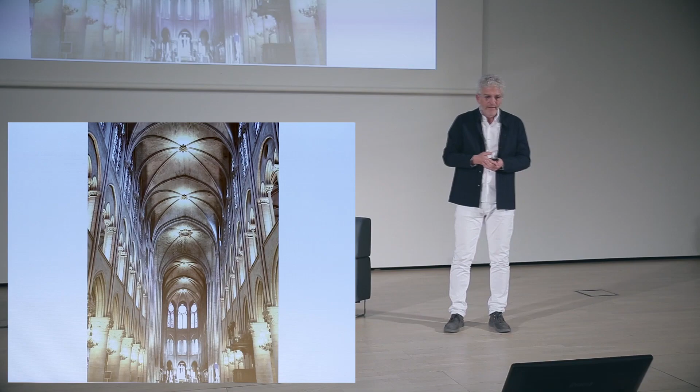And if we look very briefly at the history of architecture, we see these peaks, these great achievements, whether it's the Pantheon of nearly 2,000 years ago, this amazing dome that the Romans built, which is engineering and architecture all together, or if we look at the Gothic spaces, these light, very transparent spaces with the flying buttresses that allow this architecture to happen.

So I think we should have it a little bit darker in the hall. I want to show you the Mount Herzl Memorial as a stone-telling project. It is a project where the stones actually tell you a story when you come into it.

And if we look at the site, it is at the entrance of the military cemetery. It's in between the city and nature. It's between the noisy life of a daily city life and this silent landscape.

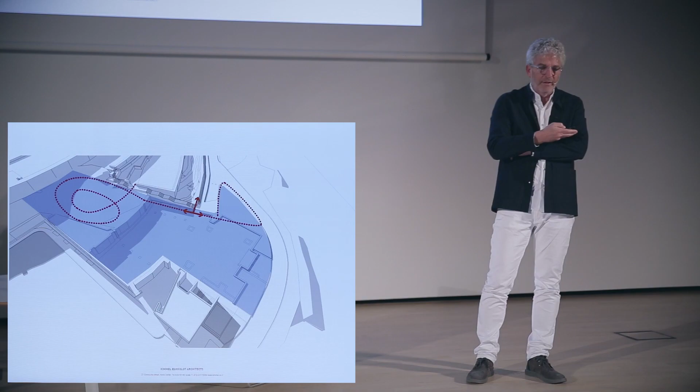And the site is very tiny. It's just 30 by 30 meters, and we need to have a big hall there, and we understood that we will have to dig the spaces underground, like this beautiful museum that we are in now, and find the spaces inside the mountain, and create the possibility to have a longer circulation than just the limited size of this site.

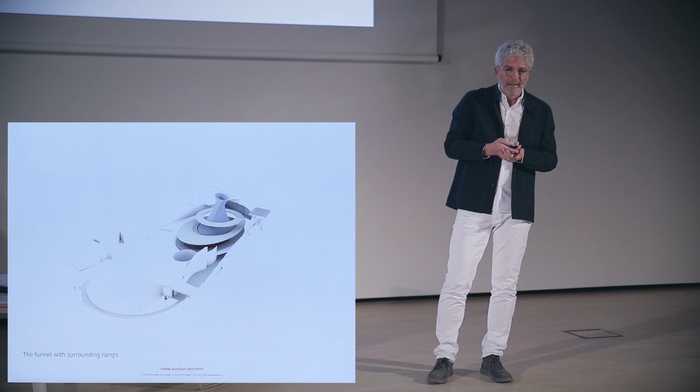So we introduced the idea of making this circulation the spine of the project, and we understood that we have to take people down from one side of this axis and lead them to the hall, and then when they are in the hall, they would start to climb on the ramps around this very special light bell, this vortex of stone and light, and then they end up in the graveyard when this wall of names wraps them all around.

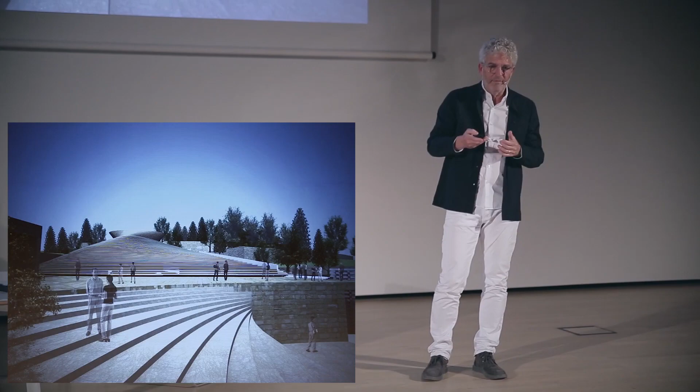And then at the end, on the roof of it, we will reconstruct the topography of nature there. We will reconstruct it by layers of stone, and these layers of stone, we see here the renderings of the beginning of the process, and these steps will function as a place to sit and reflect and connect to the nature which is around you, and look at the views, and even relate, nearly as if a treetop is in the wind, to the trees that are around it. So the stone mountain actually is affected by the wind.

And when we enter this project, the memorial, I want to talk, of course, about the second most important aspect of such a project, and that's the essence of the project. The memorial is a place where Israel decided to bring all the names of all the soldiers who died throughout the wars of modern Israel, and it's nearly 24,000 names that had to find a place here to be commemorated.

And when we started thinking how can architecture create a special place, a place that would move you, a place that will give you a sense of sacredness. How can we make a sacred place that will bring you into a different dimension, not your daily life, but will disconnect you from daily life and put you in this silence, in this philosophical mood of thinking about the past and thinking about the future and dealing with the memory of all those who died.

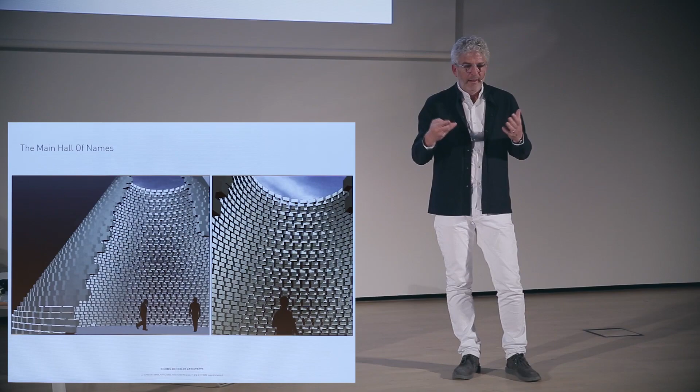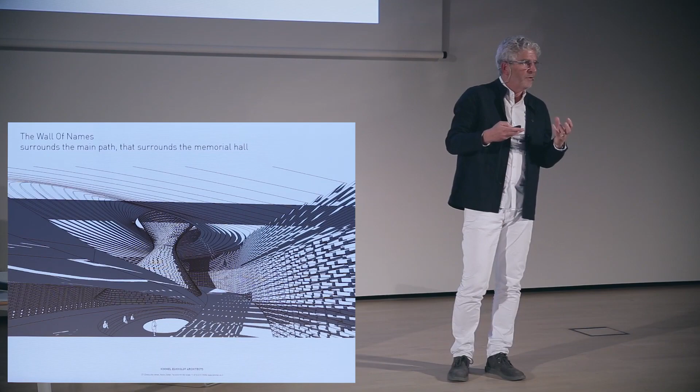And we understood that it is an issue of light, of how to use the daylight, how to create a lattice of material and light. And from the first moments of the process, we tried to find this way to build this lattice of material and non-material that will help us to build the memorial, and how to connect to the sky, how to connect to the daylight was very important. So we started to develop the shapes and the way we deal with the daylight as if it's a material, one of the materials of the project. So we have concrete, we have stone, and we have daylight. These are the materials that we are going to build the memorial from.

And we enter through a dark passage where there's a beautiful art piece by an artist named Michal Rovner. And then we see the light at the end of this passage, this special daylight.

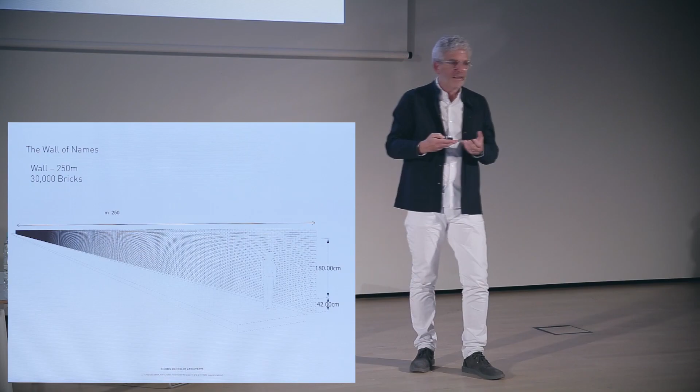But a very special moment in the design process, nearly a technical moment, but a very important moment, was the minute that we understood that we are going to do this issue of memory, the memorial hall, by bricks of memory. Every brick will have a name and a date. And this brick will be the private place of the family who lost their child. And the brick will build the wall, and the wall will build the hall. So this understanding also, of course, led us to understand the dimensions and how long this wall should be.

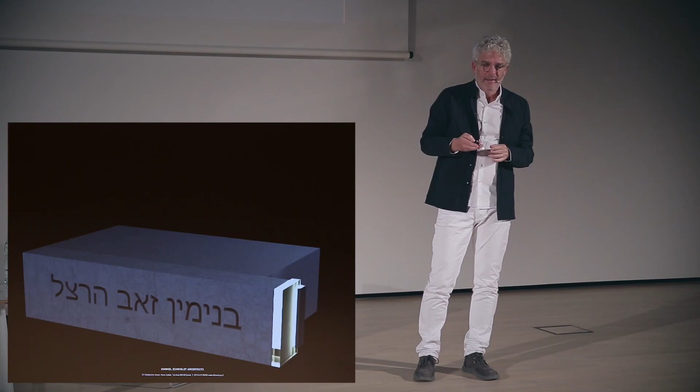And we decided to have a special light that lights on the day that this soldier died. So every day you come into this memorial, different lights shine in this wall, and also this technique of how to do it, how to orchestrate these 24,000 names.

And you see here some close-up of the wall of names. And it's like if you take one name out, then the wall loses its stability. So it's like every stone helps the stability of us, of the community of Israel. So you see here the wall of names and all the technical parts that are behind this wall of names to help with these lights.

And if I start to explain about the light bell, this vortex of light that is in the middle, that is nearly defying gravity, it was a very, very tricky piece to design, because it's totally irregular. It is ellipses that always rotate like a vortex, because we wanted the light to come in a very special way.

And if I give you a very, very short lesson in Hebrew, but an important one, it's that the word halal has triple meaning in Hebrew. It means space, it means also void, and it's also the name when you want to say a fallen soldier, you say halal. And this is the essence of the project, that this void of the space around us connects to the void in our hearts for the loss of all those who have died. And we see here that this light bell connects to the sky and pours light in.

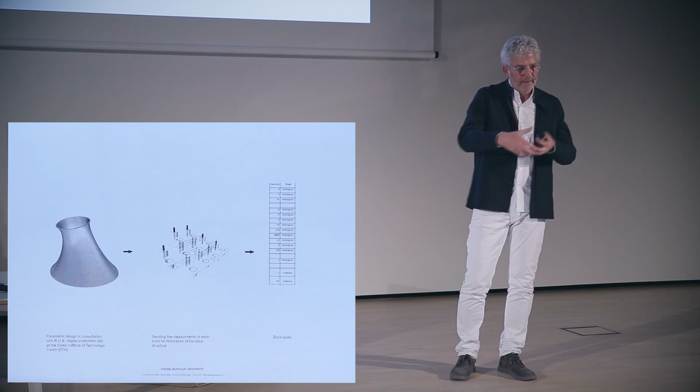And the technique that we wanted to find took quite a while to figure out. Of course, nowadays with all the computers, the parametric design, we established a system where we have a brick that is generic. It's always 30 by 40 by 10 centimeters. But every brick, though generic, is singular in the way it's CNC'd, where the bolts and holes are, and it's marked.

So when the brick comes to the site, the person only has to put it. There is only one place that he could put it. It's like a Lego. So he doesn't need plans. Once the bricks came on site, it was very, very quick and very, very precise. And this precision is a very special phenomenon, because it looks nearly like a natural phenomenon more than a man-made structure.

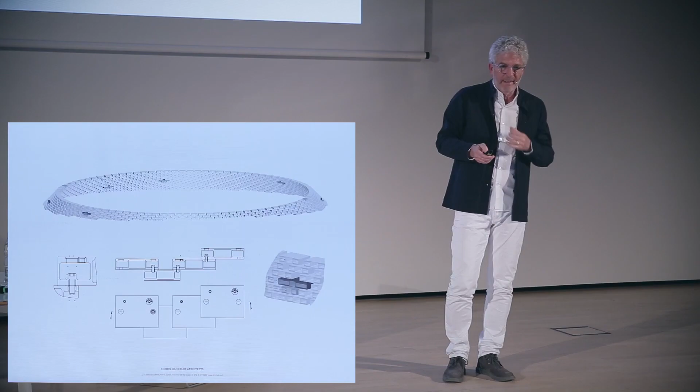So when we analyzed this and we did some mock-ups and understood exactly how we're going to build these bricks and how we're going to connect them and how we're going to fulfill all the demands of the engineers, we also had to find a way to calculate engineering-wise all this structure. It was very, very difficult, because structural engineers in Israel couldn't really cope with this irregular form that has no secondary structure to it. The bricks take all the load.

So finally, what we found is that the army has these engineers that in daily life design tanks and war machines, but they have this knowledge and this expertise, and they could help us with calculating it, and that's how we managed to build this form.

And you see it when you walk around it, and the ramps are all around it, and the way the section is, where you have the mountain around it, and you have this light bell, this vortex in the middle. And what we did also is we used the computers to create the molds for the floors, to create in the CNC these very, very soft shapes, because we wanted the building to feel soft, to surround you in a soft way. So all these curves and lines could only be done by computerized molds, to reach these very, very smooth lines of concrete.

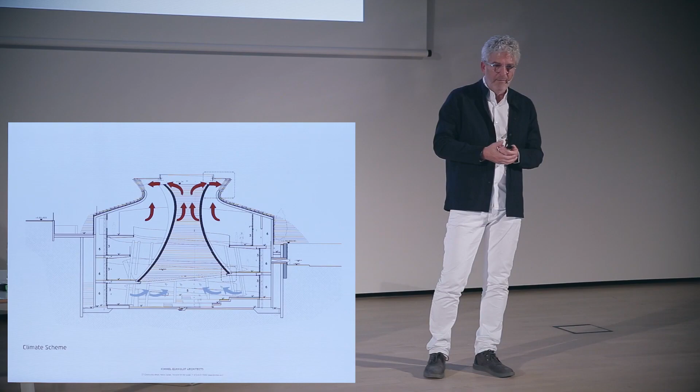And speaking about sustainability, I know that we architects always love to draw, when we send competitions, these blue arrows and red arrows that describe the air, but this project is really a proof that it actually works. It's really cooler in the summer and warmer in the winter because it's underground, very deep underground, and the hot air can go only upwards.

So I show you a bit of how this space feels, and how it has to bring you into a certain state of mind, of a sacred place, of a place of memory. And if I show you the process a little bit, it's in this movie.

Sorry. Why is this movie not working? Can you help me there?

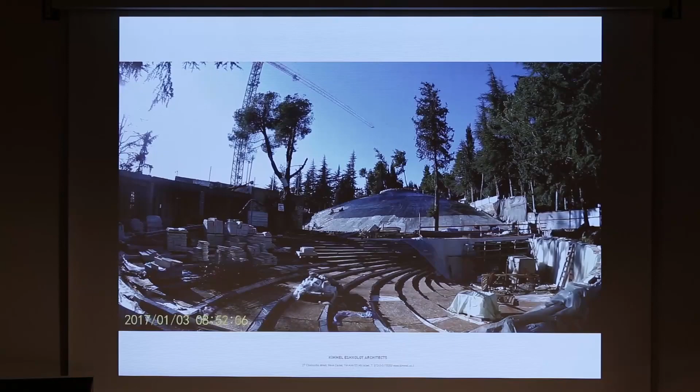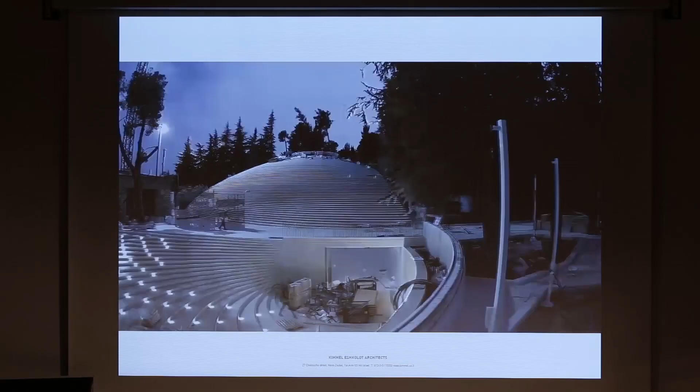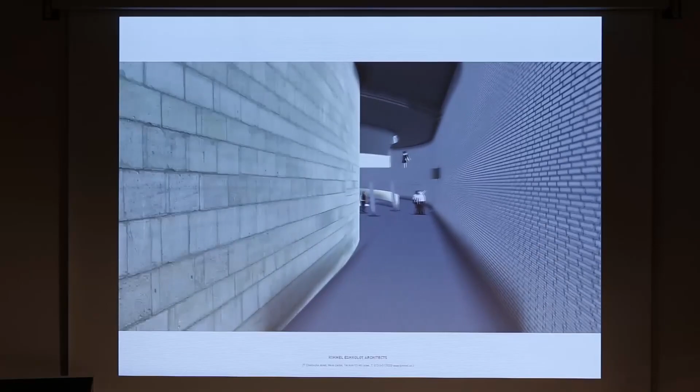Right. So what we see here is actually the process where we started off with the renderings of this memorial, and how we enter the memorial with this ramp leading us down to this passage where this artwork is. And we see how this topography of stone is being built layer by layer, and becoming this mountain of stone, and the way the steps lead you down to the space of the memorial itself.

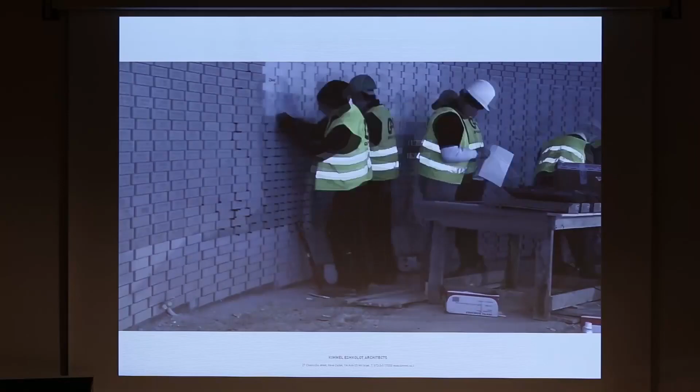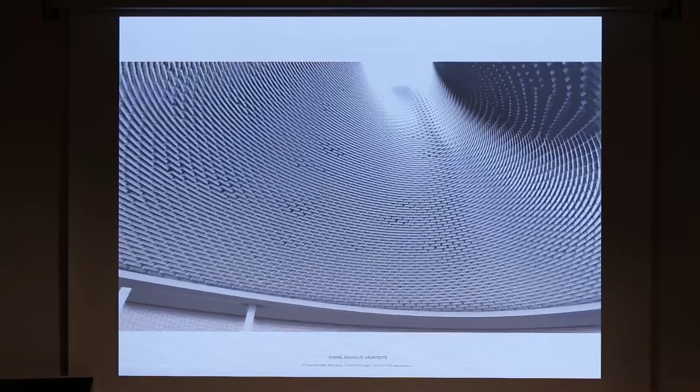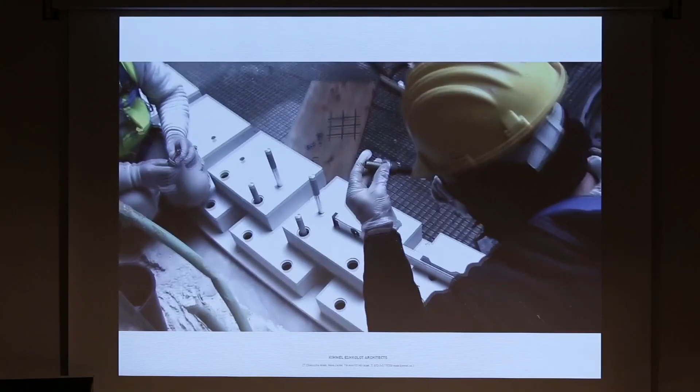Here we see the passage, and how the builders built this wall of names, and every name has this specific brick and a light next to it that lights, and how they cast all these ramps and all the floors, and the light well itself, with its beautiful daylight coming in the models, and then all the design process until it actually came to site, and they only had to screw the bricks that came and put them into the position.

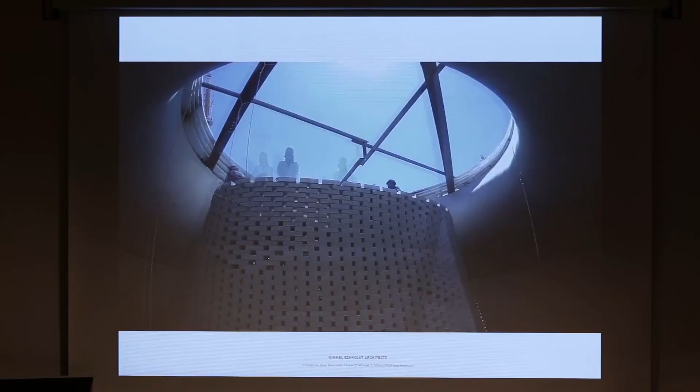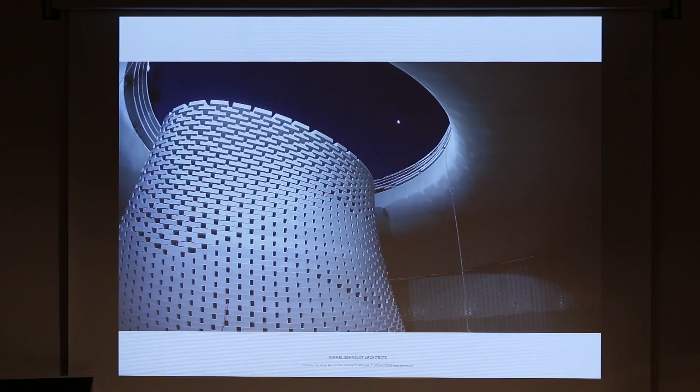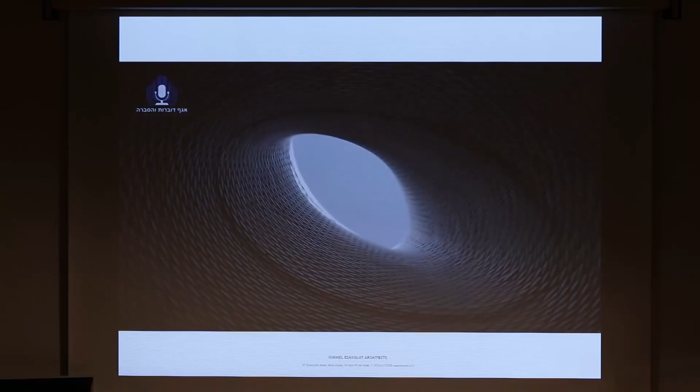It wasn't so fast as in the movie, but it was very fast to see this shape become, and very, very fascinating. And this is how this looks today, with actually the material of daylight as a key player in the project.

So this was the Mount Herzl memorial that I wanted to show you, and I want to show you now, to stay in Jerusalem, I will take you later to other places in Israel, other climates also, a museum we did some nearly 20 years ago. It's a museum of archaeology, and it's inside the walls of the old city, and it's for us nearly urban renewal. It's an urban renewal with a gap of nearly 1,600 years in between.

There are remains of a 7th century Umayyad palace there that we see here, and there were hints of how the Herodian street was still there, and you could feel the city, how it was in the 7th century. And what we did is actually we caught a corner of such a palace. Oops, what's going on? Sorry, let me go back a little bit.

So we had these remains of the walls, and we had to think of how to build this project. And what we decided to do is put everything again underground, where the ceiling of the project is actually the floor of the ancient palace, but most of the spaces are underground except for one piece that is totally transparent and is 4 meters above ground.

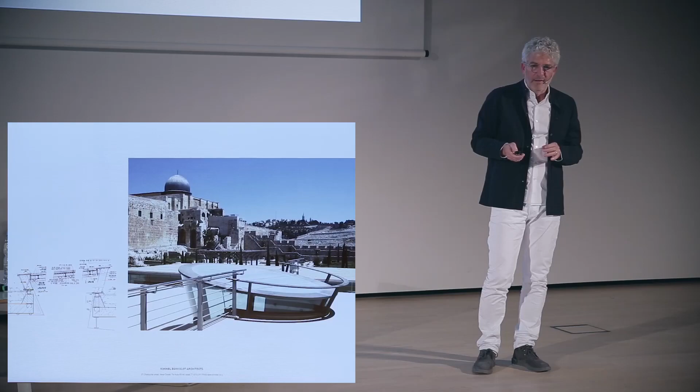And you see that once the building is above ground, it's very, very transparent, very crisp in the way it's detailed. And again, we did something that had to do with technology there. We have this oculus of glass that is the only landmark of this building, and it's the last moment that we see the vistas to the outside before we go into the dark spaces of the museum itself.

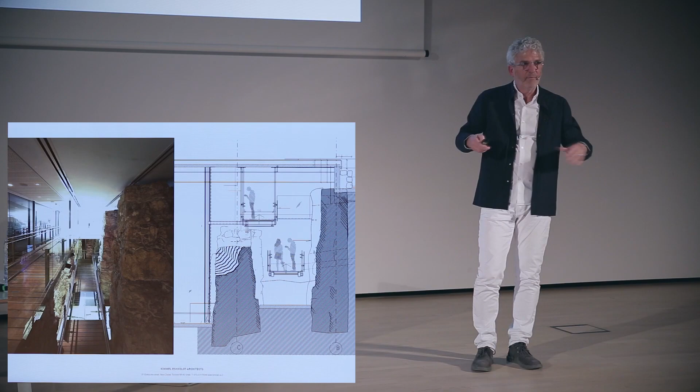And once we had to introduce circulation, we did a whole set of ramps that lead you down. They float between the old walls. You see them here leading the public down to -8 meters from where they entered. And how to, again, do old and new, and how to make a celebration out of it, a sort of love story between the very new and the very old. And if we do an opening in the old walls, we don't disguise it as an opening that was there all the time.

We actually saw this thick wall was a new opening, and all the technology is inside this new opening. And again, we have this transparency around it, I've showed you that.

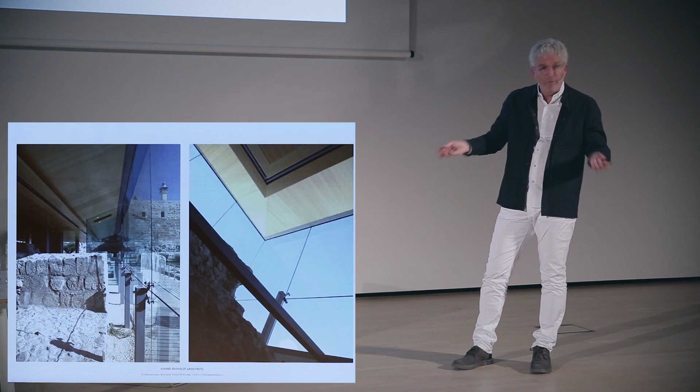And this transparency, if I may say just a few words about it, it was quite, let's say, a challenge at the time to have a huge glass that is only supported by two spiders at the bottom part of it, and the rest of the 4 meters are completely without spiders, and how to create the roof so that it doesn't move even 1 millimeter, so this glass will not break.

And it was important for us, again, to show you how transparent this building is towards the vistas around it and towards the old walls of the city that this building is next to. So this is what was important for me to explain about transparency in the Davidson Center and Davidson Museum.

And now, if I take you to an area that is nearly the desert in Israel, it's on the verge of the desert, 200 millimeters of water a year, and the city is called Beersheba. It's a young city with a lot of universities. And what we designed there is a rehabilitation center.

And the rehabilitation center, talking about site and context, was just in the middle of nowhere, in the suburbs of the city, nothing to relate to in, let's say, the vicinity of the project, except for a beautiful art piece, I understood that you had an exhibition here last year of this work of Dani Karavan, who did a beautiful work about 500 meters from where we designed this building. And this was a little bit of a context for us to relate to the way he used shapes and concrete in the desert.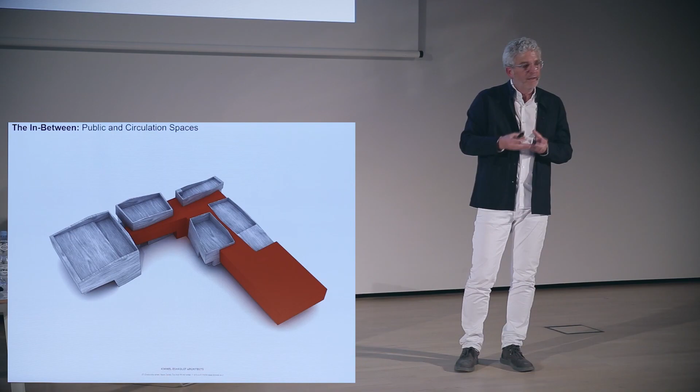And in between these functions, we will have the inner spaces that are used for public spaces, for circulation, for things like that. And this in-between space becomes a very, very light space with very special quality, because it's between the rocks. It nearly looks like a gorge between rocks in the desert.

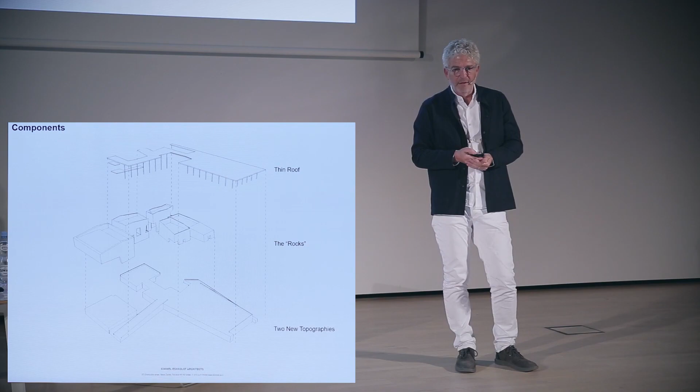And the components of the building are the ground, the topographies of the ground with the ramps, the rocks themselves, and a very, very light roof on top of it. And this is the assemblage of these rocks and the roof.

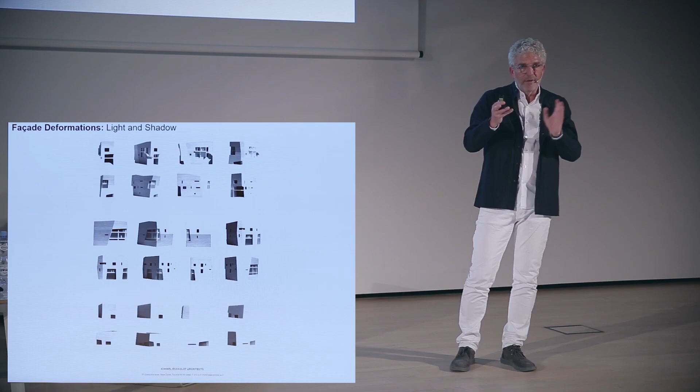And by designing these rocks very carefully, penetrating them with little openings because of the strong sun, and understanding exactly the vistas and if it's north or south, it's very, very crucial in this climate. If I spread the elevations of the rocks, it looks like something written here in a strange language that I'm not sure I can read. But we did this drawing because we wanted the building to be in exposed concrete.

So we had to know exactly the amount of elevations that this building has, and the client wanted the building to be in stone. And we architects all love exposed concrete, it's so powerful and so fitting, I think, to the desert landscape around us. So luckily we convinced the client that it's cheaper to do it in concrete than in stone. So they agreed to go with us with this exposed concrete.

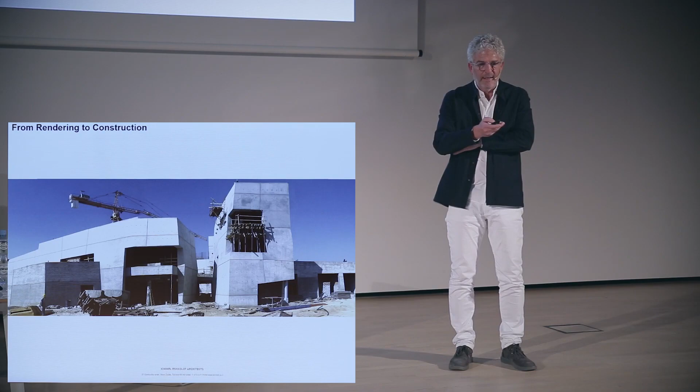And exposed concrete, as you know, is a tricky thing. You cannot make mistakes. You have to do it very well. It's a one take, like film noir. You cannot edit it afterwards or cut or glue parts together. So it's one take, but that also gives the power of such a project. It creates a certain integrity to a project that you cannot reach when you clad a project or you give it a sort of dress after you've built it.

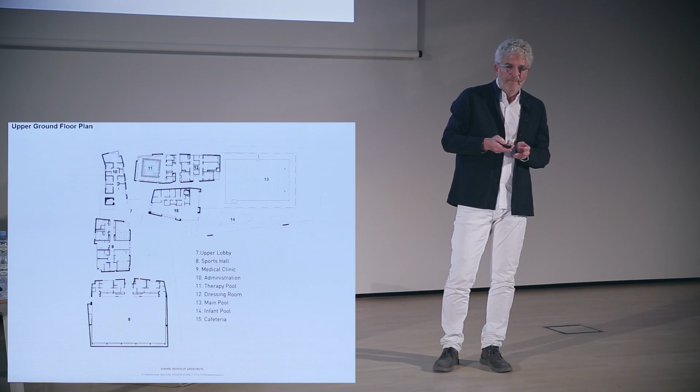And you see here the way the project is built in actually the rocks. You identify the rocks with number 8 as the sports hall, etc. All these functions are in the rocks, and the in-between spaces are sort of finding their way between the rocks. And here we see these special needs of these people, and how to make this building extremely accessible.

Not only accessible because the law makes us make buildings accessible, but really understand how these people feel, how to make them understand the building, how to do the circulation of everybody in ramps, so they don't have to go in a different way than other people, or how to create these ramps and bring them into the swimming pool, that they could slide, or that they have views to the outside, even though their level of height is 1.20 meters.

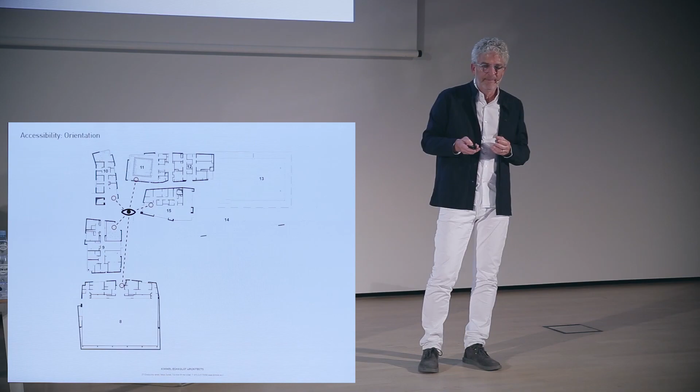And you see here this swimming pool with this accessible ramp to the water, and how you enter the building, and immediately you understand what's all around you, where you want to go. It's very, very easy to orient inside the building, and how we pour in daylight in a very protected way, to bring in light, but not the harsh sun of the desert, in a soft manner.

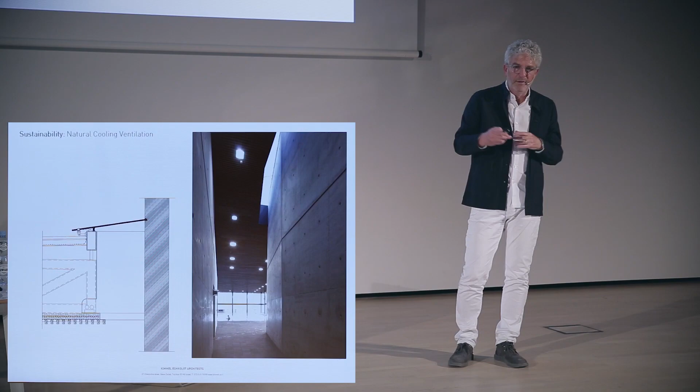And the windows are deep inside the wall, so the glass is protected by the building itself, and we cool the building by the water of the swimming pool, protect from the sun in summer, and bring the sun in in winter, because the change of climate in the desert is extreme. At night it's very, very cold, and at day it becomes hot. So the task of architecture becomes very important when you build in such extreme climate-changing temperatures.

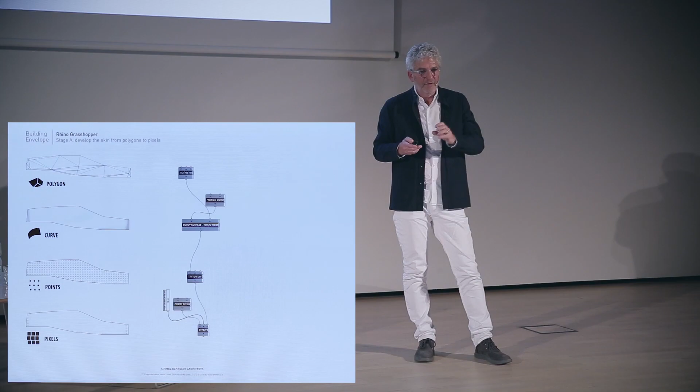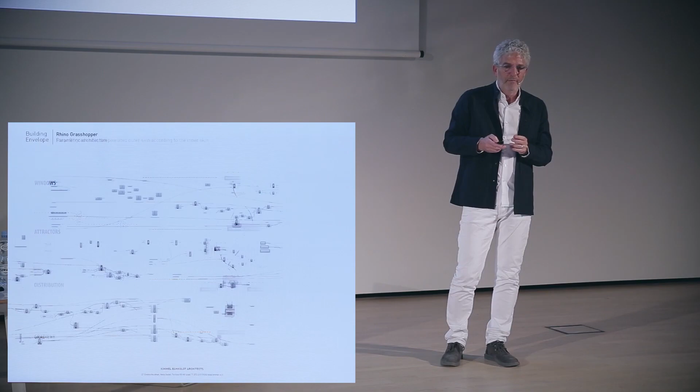And we show that we take this envelope that holds all the functions inside, analyze them, and by parametric design divide it into pixels and give every pixel a certain transparency or reflectiveness, so the glass changes gradiently between the dots of this elevation. The drawings are beautiful, but still we had to figure out how to do it.

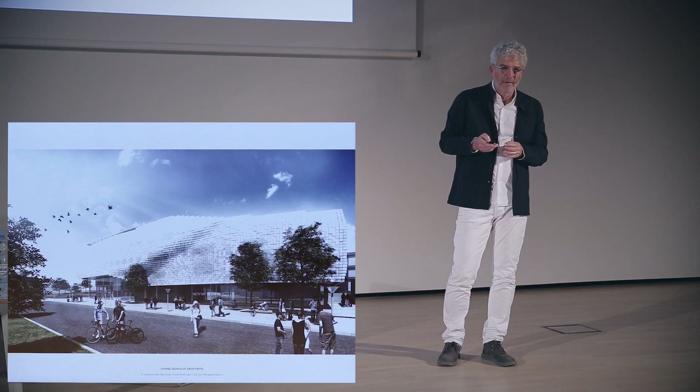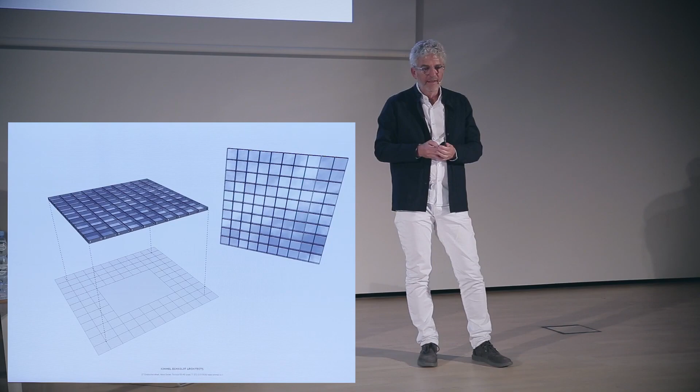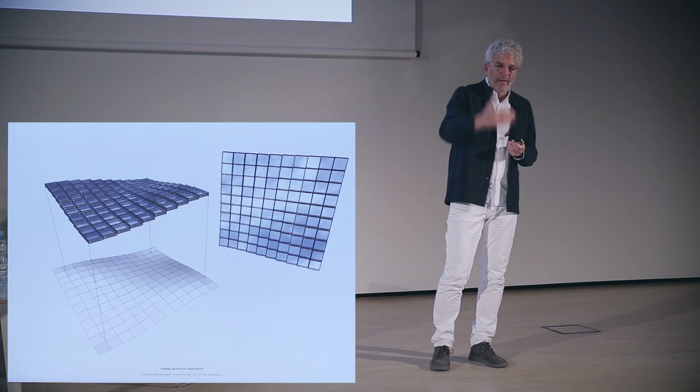And this is already a later version of the envelope, because finally we realized that it's not so complicated to create a system that can be three-dimensional, can be made out of pixels, and we could control it in space. And we could actually take this very simple system and give every pixel its distance from a certain plane, and by that we could create anything we want. We could have this very three-dimensional elevation, and we could take the glass and design it, so that it has different types of transparency and of reflectiveness, as I said.

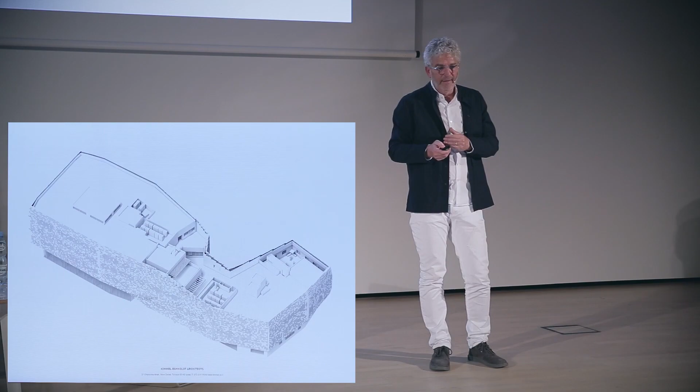And when I look at the building, we take these functions and we wrap them with these glass pixels, so we could be very, very free in the way we design the building, because the envelope can take the difference between a floor and a floor. So if this floor needs more space, it could have more space. If this floor needs less space, the envelope could solve it. And this is how we developed this building, and it's now under construction.

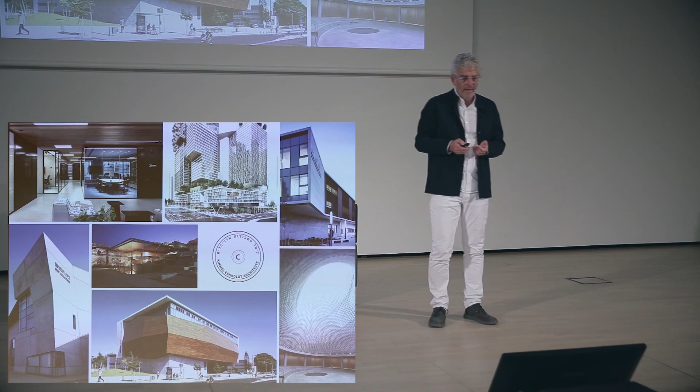We always go from the very, very big project like the one I'm going to show you now, the urban scale project, all the way to very small projects, and this play between the scales is the essence of architecture for us, and not only it keeps us awake because we never do the same thing, but we feel that we bring knowledge and understanding from one scale to the other. So I want to show you now a real intensive vertical city that we do in Tel Aviv.

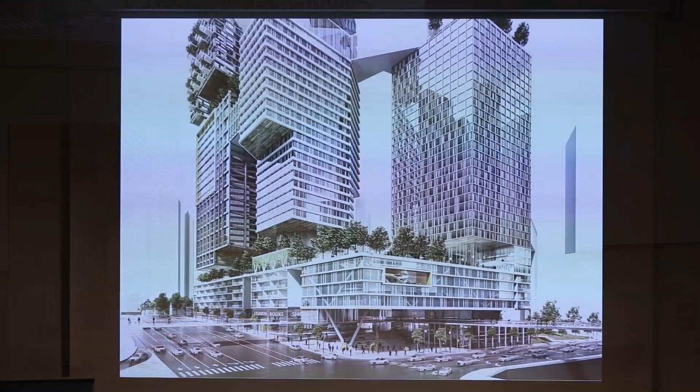It's a project in the center of Tel Aviv. As you have here these coal mines in the center of the city, we have a very big army base in the center of Tel Aviv that is using very, very valuable land. And alas, it's not because peace is coming, it's just because the land is so valuable that the army steps out of the city and gives this land back to the city, and that is a very special opportunity for the city of Tel Aviv. It was a competition done by the city of Tel Aviv of how to deal with this project that is really in the center of the center of this 3 million metropolitan city, bigger than Tel Aviv itself.

So if you see, it's there on this very, very built area, and it's on the highway that divides the city north to south, and on the way that divides west to east, and now it's scattered buildings of an army base, small buildings from various times, and the city asks itself, how can we make this a very dominant, vibrant city center? And it's already very, very intensive all around it.

There are towers all around it, and what we suggested here in the competition that we won is to really take it into an extreme of a vertical city that not only rises to 80 floors and 100 floors, but also creates a lot of public spaces in other levels. It's a research that is done in 10 cities. There's in Singapore a sort of a project in this way of thinking,

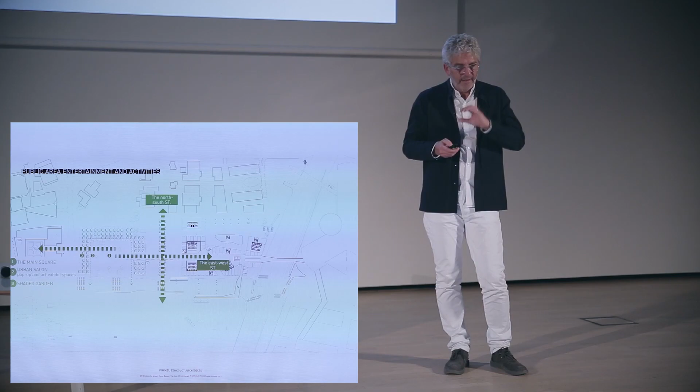So we have the level which is... do I have a light? Yeah, I have a light.

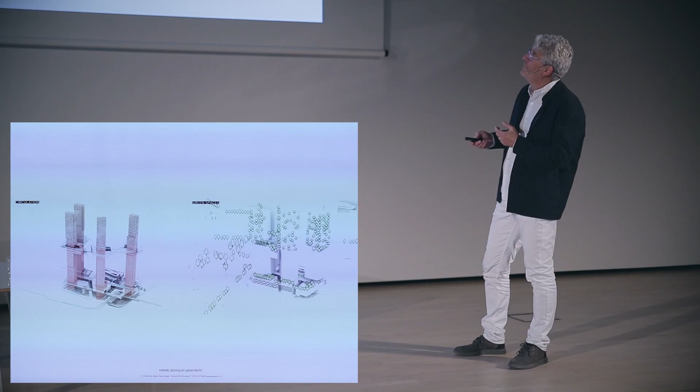So we have the level that is on the podium, which is the level of, let's say, the neighborhood, where you have the kindergartens, you have sports facilities, etc. That's here. And then on the 40th floor, you have a connecting floor, and the hotel, which is here, takes care of all these spaces. These are the conference spaces, the gyms, the swimming pools, the restaurants, etc. And it's a sort of a hub inside this

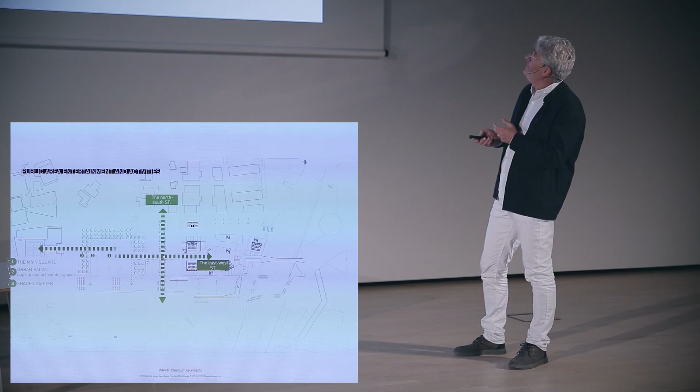assemblage of towers. Sorry, I'm going backwards. And on top of it, we have the housing that will pay for all this project, because housing in Tel Aviv in general is a very expensive and good business to build. So we have this floor here that connects.

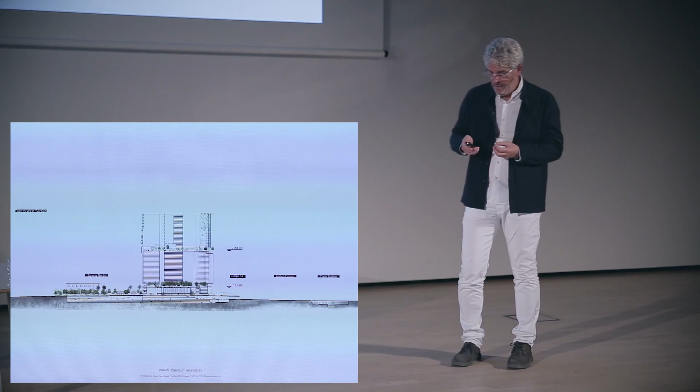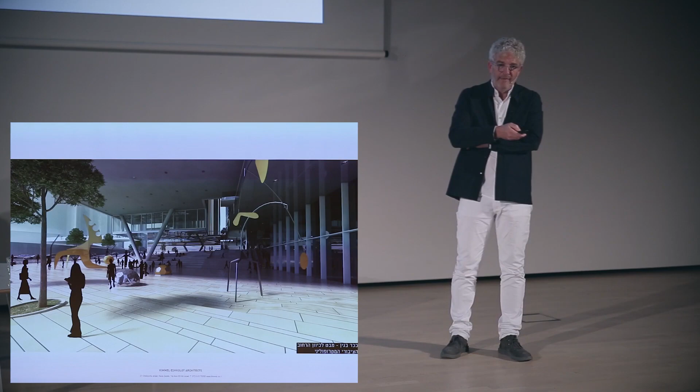We have the floor here that is, let's say, the neighborhood facilities. We have the affordable houses and all the office spaces on top of it. So we see here this idea of this level of the neighborhood with its kindergartens and open spaces. We see here how it connects to the city life. And I jumped to another project.

So the architecture that I want to show you now is a museum for natural history. It's in Tel Aviv University. It's a building that we just finished about half a year ago. And the university has a very, very special big collection of nature, insects and fish and all kinds of zoological pieces from the area of Israel, and this collection is a research building, so they have to research this collection.

But the university decided to make also a museum out of it. So it's a building that is a sort of a hybrid between a museum and a research building. We have researchers that come there every day, and that's their working space. And you have the public that comes and looks at the collections, and for them it's a museum.

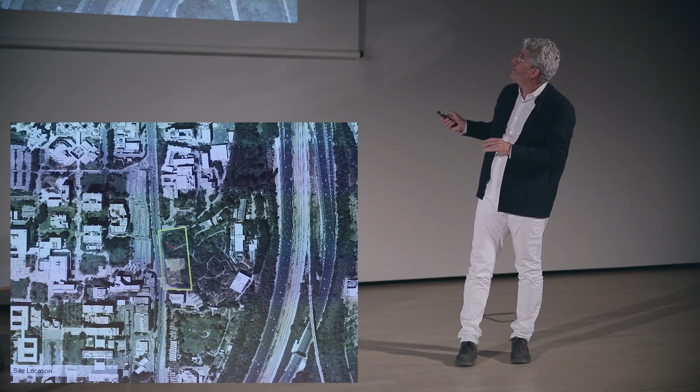So what we see here is the site was a parking lot, an open parking lot, and we have the botanical gardens here, and the university is here. And we wanted to bring the botanical gardens to the street, that they actually are present on the street itself and not behind the parking lot. So we sort of brought the green into the university and had the building float above it, nearly not touching it, and becoming the grand entry to the gardens. So the building is floating above.

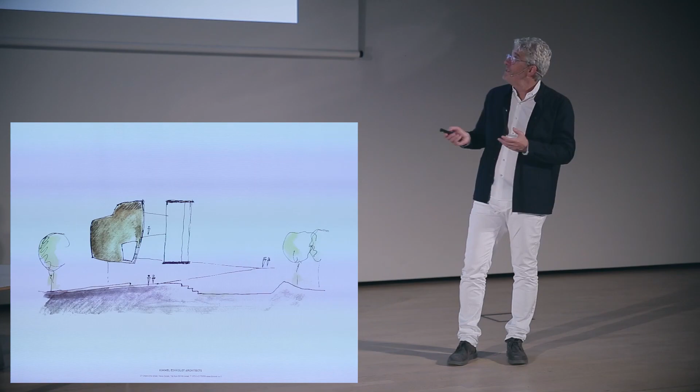We have the collections, the box of collections that have to be without windows, and they have to be very well protected climatically in all conditions. And we have the researchers' part that connects into it, and we have the public that walks all around the building. And these were the very first sketches and the competition renderings of this building, where you see the collections, you see the way this building actually invites you to walk to the gardens.

And you see the land that it touches is very scarce. It's mostly above ground, and you see here all the elements around it: the entrance hall, the topographies that are protected, and there are gardening spaces.

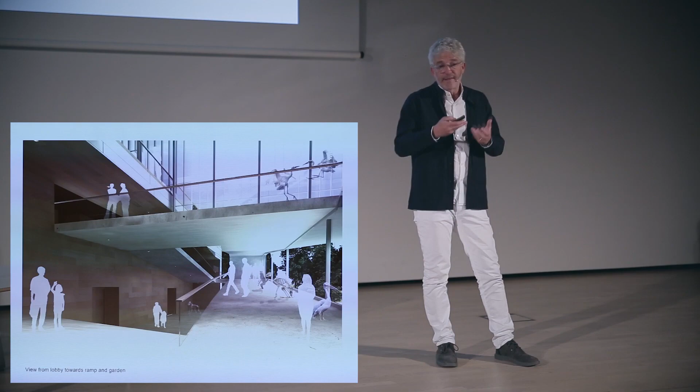And the building itself in its stage of rendering, where the idea is to have the people move in the building by ramps, letting them climb slowly up, let's say, the exhibition spaces, all the way to the collections, where they look as if they look at the collections themselves.

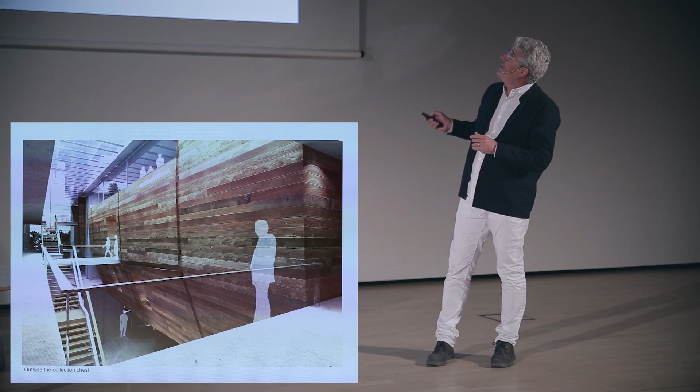It's like a half a peep that they get, sort of a peep show into the works of the scientists themselves. And the scientists, they enter the collections by bridges that bring them to the different levels of the collections themselves. And we see here how these two parts play together, and the collections are here, and the public walks and sort of has a glance into the collections.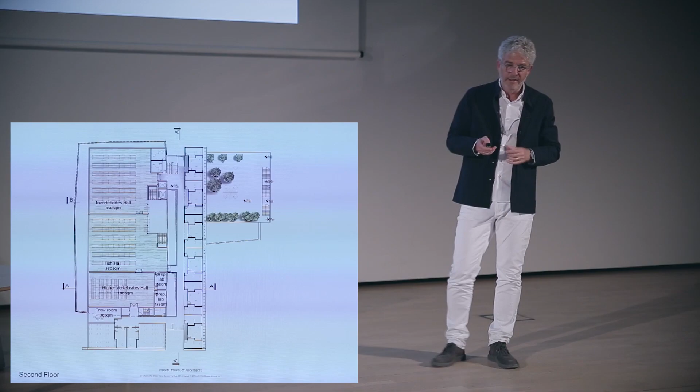And here it's this moment where they enter the collections and they see inside the collections. And you see the stripe of laboratories on the east that are entering these collections by bridges, and this section of the two parts of the building, and a longitudinal section that tells again the idea of the collections, the laboratories, and the visitors. All these work together in one building.

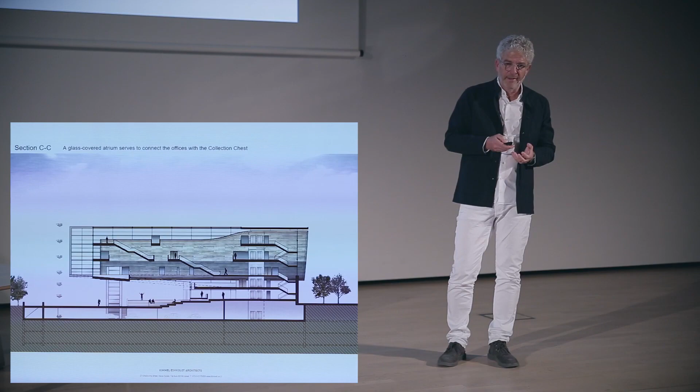And we see these parts of the building where the collections and the laboratories and also some classes. If I show you the components of the building, you see these parts that are connected together, the circulation above the general public spaces, the collection boxes, and the laboratories that are surrounding the collections, and maybe in the future some more spaces.

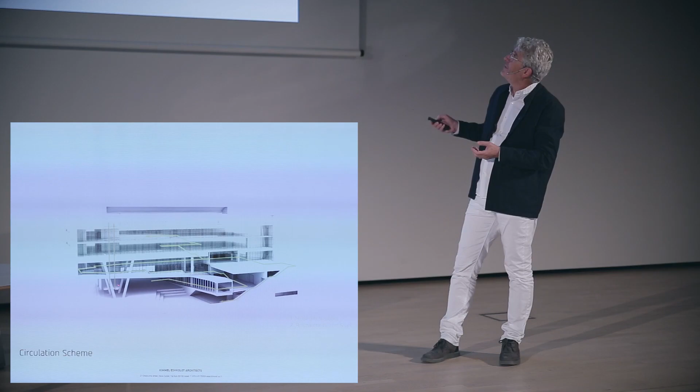And you see here the way that the public goes through a certain route where the scientists have a different core, and they walk in the building in a different way. It's like also in a court, if you design a court, the judges go differently than the public, so it's like dividing these circulations and joining them together where we want.

And the actual building, where you see this box that we did, is made out of a material called Prodema. It's industrial wood that actually doesn't change in the sun. It's cladded as an HPL kind of cladding, and it's very clear to see the parts of the building and how they connect to one another, and the details of the box that is floating above the glass volume. And this is the east facade of the laboratories looking to the botanical gardens.

And you see here again the idea of the ramps that lead you, and then you walk on this ramp upwards. So it's actually a building with no galleries. It's a museum with no galleries. It's a museum where you experience it only by walking through these ramps and seeing all the exhibitions that are all around you.

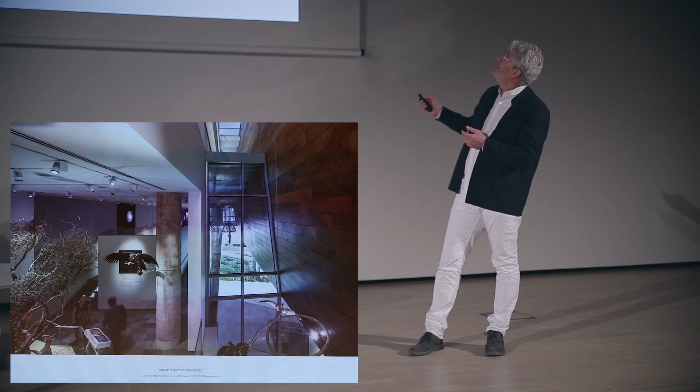And here you see already inside the ramps coming up for the public, with the exhibition starting to be all around you, and you walk through these exhibitions in a linear way, all the way up to the collections themselves. You see here the situation of the box, of the volume of the laboratories, and of the public that is climbing, and eventually they will cross this bridge and go into the collections themselves.

And that is the most exciting moment of the visit, where you could see the scientists work there inside. And these bridges that connect, and the very nice daylight that comes in between the collections and the laboratories, and the scientists, they cross these bridges.

And again, these components and this entrance to the building and to the gardens, and this whale that is floating in between the two parts of the building. There's a skeleton of a whale, and these vistas that you have, inviting you to go inside, to explore these spaces, and every ramp is again an opportunity for an exhibition for the visitors.

And yet another project that is very small, not heroic, not big, not a memorial, not a museum, just a small community center in a small city in Israel. But what is nice about it is that it manages to create its own surroundings. It's a little city by itself. It has buildings that create a small piazza in the middle, and so the parents come and spend time in the piazza, and they see the kids in the activity rooms.

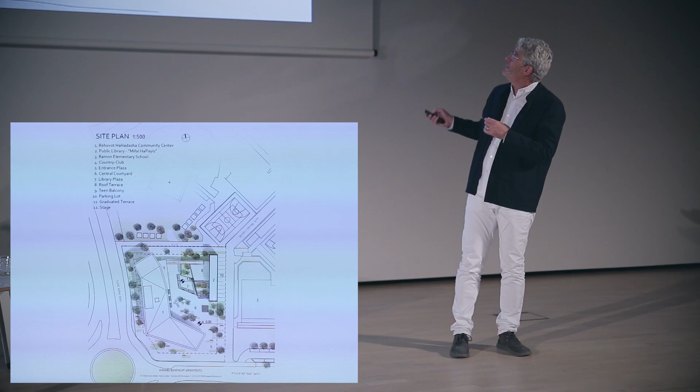And it's just in a suburb of a small city, and the idea is to have a building split into two buildings. One is a library, and one is the community center, and in between is the plaza, and you can walk on the roofs, and you can cross from one building to the other.

So you see here, on the right hand, the library with climbing to its roof, and on the left hand you see the community center, where its louvers protect from the sun and are in an angle that gives you views to the outside without letting the sun come in. Only when it's exactly north, you see the glass elevation that is transparent, and you see the bridge connecting between the buildings.

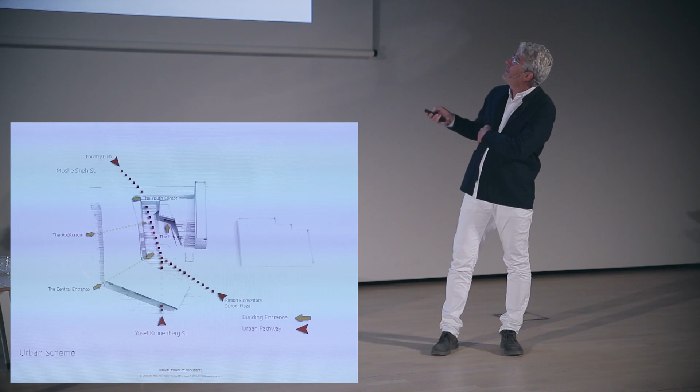So this whole assemblage becomes a sort of a playground in itself, that kids could walk from one side to the other. And the building also invites to walk through it and stay in this plaza. And there are a lot of entrances to the buildings, and the notion of this walk on the roof and down the other stairs, and these exterior spaces that become part of the project. The Israeli climate is quite often nice enough to spend time outside, and so the exterior spaces become as important as interior spaces.

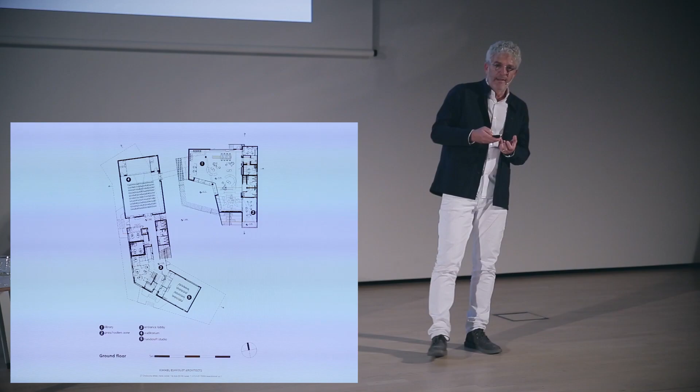And you see here how this building is organized, and the interior spaces that lead you through the corridors with these vistas outside through these louvers. And this children's library with its spaces and its colors, and the way this building protects this exterior plaza that is inviting you.

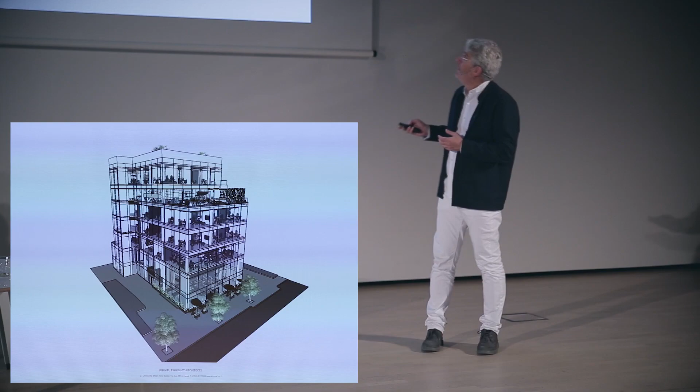And now I go into a small-scale project, nearly interior design, a project that we did for Startup Nation. It's a foundation that tries to create connections between the startup world of Israel and the world. It's a place that has a few floors, and the floors are organized so that some floors are for connections to the world, some floors are real office spaces, and some are for the local ecosystem of the people that work in Tel Aviv.

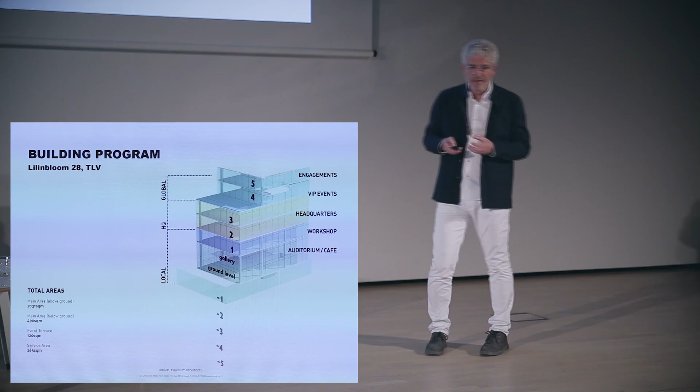And let me see if it's here. You see these parts of the building where you have the lower part that is for the local ecosystem. You have the yellow, which is the office spaces, and you have the engagements that are global for the world. And you see here the spaces that we designed inside, where this is an office space where everything is transparent,

and this is a floor for delegations and engagements. And I will show you, I hope, also a three-dimensional model in a minute, and staircases connecting from one floor to the other, which is, again, just to enjoy the details of how to make a celebration out of a staircase.

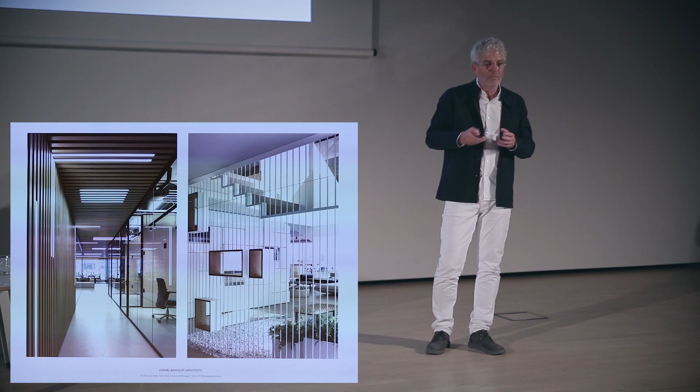And connecting it, if I go backwards, to what I said to you before, that scales of work are affecting one another. This pixel wall is actually a model that we did that has connection to this computer science building that I showed you before.

So this is to show you a little bit of our interior work that is part of the office, part of how we want to crystallize the way we deal with details, with materials. We want to be masters of this scale, and it will help us in the architecture. It will even help us in our urban plans.

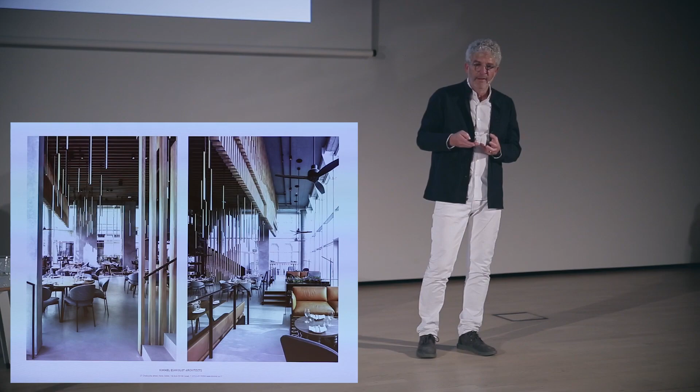And you see here on the ground floor a restaurant open to the public that we did. It is also in the same language and the same spirit as the building itself, with its details, and the stairs going to a sort of a lounge which is above.

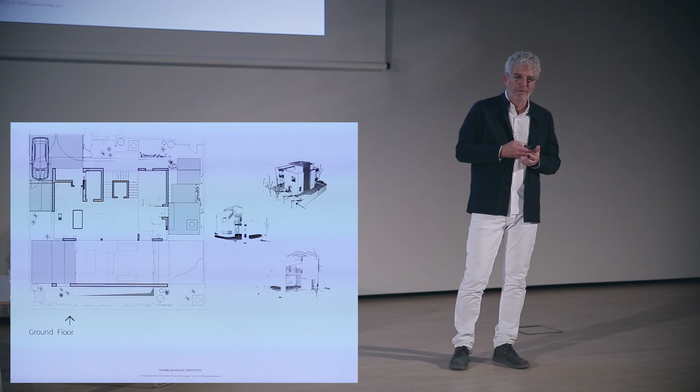And this villa is in a way playful with the Bauhaus language that is all around us in Tel Aviv. Tel Aviv is very much a city of Bauhaus. There is a big area where, I would say, 80% of the buildings are preserved buildings from the 30s and the 40s. It's declared as a UNESCO heritage area.

And this Bauhaus idea is put into this building with ideas of how to bring openings into the building, and also inside the details of the house itself, where you see here also a little bit the exposed concrete that we love to explore, and these beautiful openings to the outside, and you see here this living space and the staircase with the elevator inside.

And these very small openings to the outside, and you see here this kind of cut of how the window is cut out and becomes the protection of the entrance door, and this is how the building is from the outside in this street.